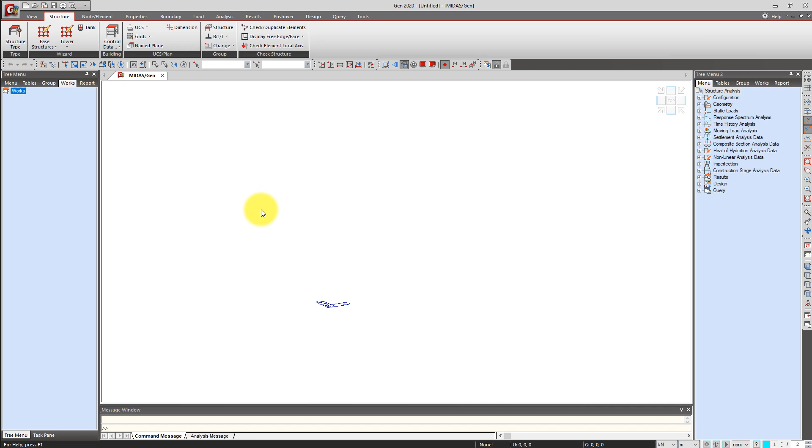The next is you can directly start the modeling from scratch. If you have some frame model, you can directly go to Node/Element, and there is create nodes, the node modeling or element modeling. You can find various types of modeling functions here in Node/Element.

And there's another way you can start. If you go to Structure, here we have a wizard system. Using the wizard you can model typical types of structures very quickly. In Midas we have this tower wizard, with tower leg, body and arm. Today we are going to use the tower leg and body functions to model our transmission tower.

I will start with the tower leg first. When you open tower leg, you can see this kind of dialog box. Here in the tower leg, we have 4 different tower legs. You can change the length of your width, the number of panels, and the select type, front and plane. I will use the default select type for the front and plane.

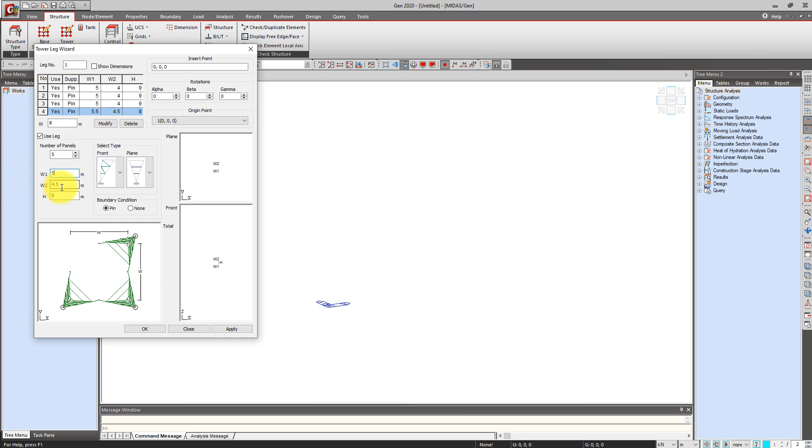When you change your dimension, you can click modify, then you can change the size of the first leg. I will also apply the same input data for the other legs. Using these 4 different dimensions, you can modify your tower leg size by yourself. As you see here in the figures, it will directly be affected when you modify your dimension.

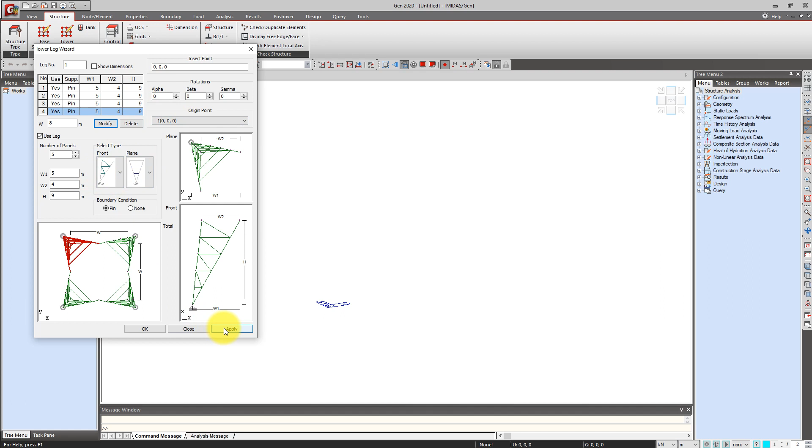After you finish inputting the size, the select type and other options, you can click apply to import your tower leg wizard into your model. As you see here, our tower leg has been imported in our model view. After you check the tower leg is successfully imported, you can now close your dialog.

Now we are going to generate our tower body. In tower body, you can also modify your size; we have W1 and W2. I will input 8 meters and then 3 meters. Here you can add the components for the tower body, the type horizontal and vertical. For vertical you can change the row of redundants. I will input 2 rows of redundants, and change the type to this type. You can use different types of redundants.

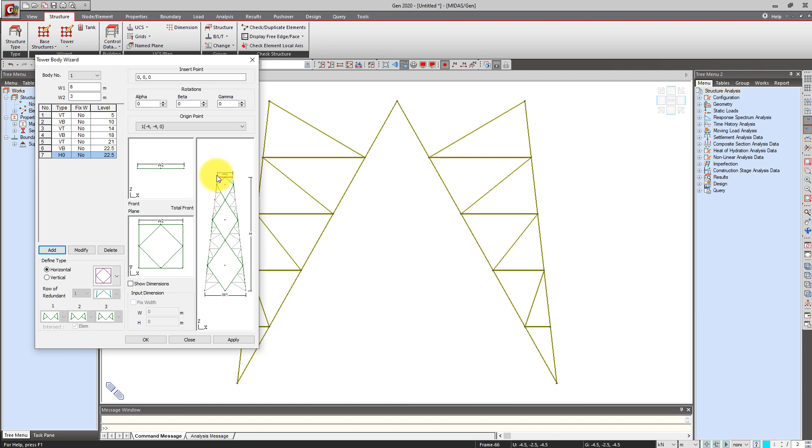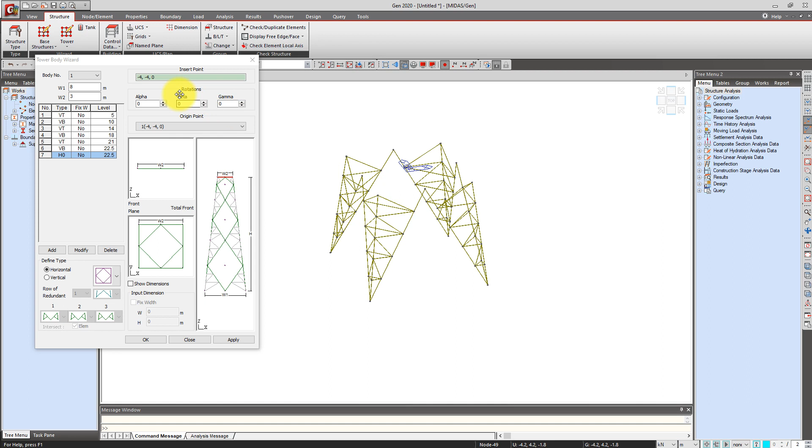So now you can insert this body into your model. If you see here, the origin point is visible. You can detect your insert point when you click your mouse button, and now it will detect -4, -4, 0. Now click on apply.

So you can check your model, your tower body has been successfully inserted in your model, and now we can close. As you see here, we first generated our first leg, and then we added this tower body.

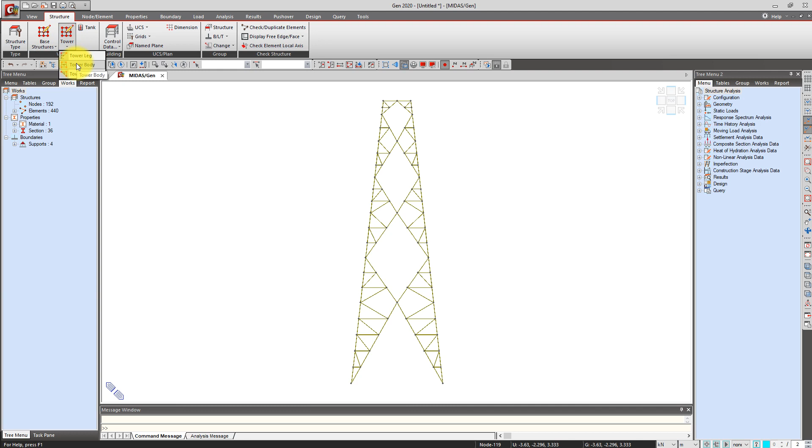Next, we will add another body type. So you can go to tower, and then tower body again, to add another tower body. Now we will add W1 as 3 meters, W2 as 1.5 meters.

Using this tower body or tower leg wizard, you can quickly add your modules and generate this tower modeling very quickly using the wizard option. We will use the same shapes type for the second body, with height 2 meters.

Click on add, and then another shape, the same one, with height 2 meters. Click on add, and then a different type of shape, 2 meters. Click on add. I will also change the shapes, 2 meters again, click on add, and also one more. I will click on add.

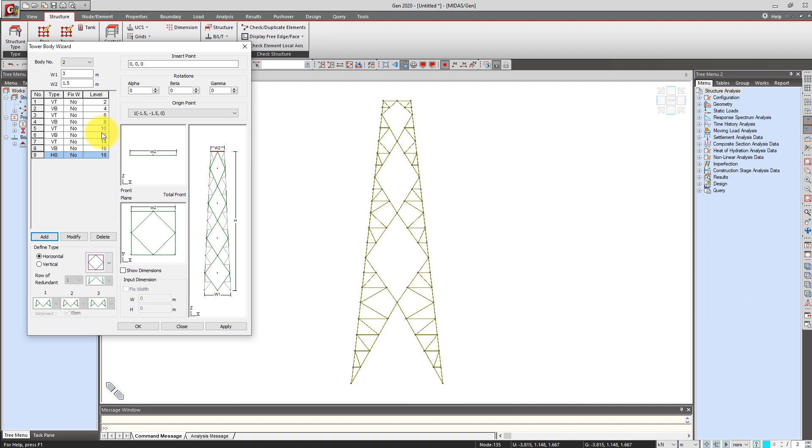Finally, in the top position, we will also use the horizontal type here, and click on add. So now we have this 16 meter level of the second body.

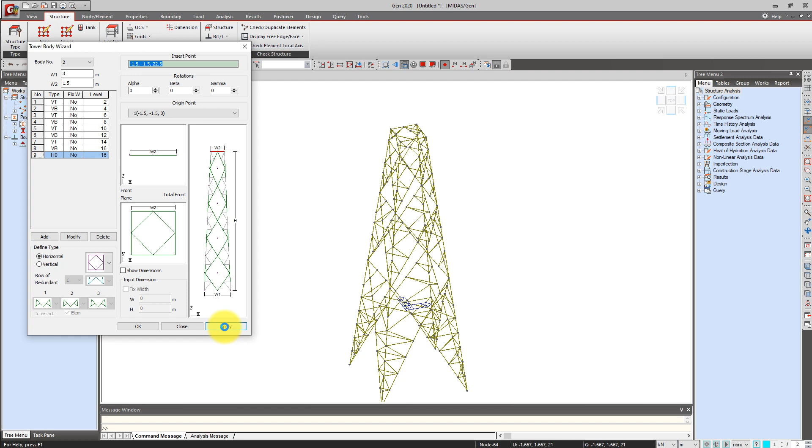In the model, you can click insert point, detect the point here, and then click the apply button. Now you can check your tower model body has been successfully inserted.

After you finish, and check if your model is okay, we can close the wizard. Now we have this type of telecommunication tower, steel tower.

Here in Midas, the third module is tower arm. Tower arm is used mainly for transmission towers. You can use your arm body, and then left arm or right arm.

You can change your number of panels, or change the front type direction and diagonal directions, so you can change your types. The plan type, you can also change this type.

Using tower arm, we can also easily model this kind of tower arm for the transmission tower. For our example, we will not use this tower arm wizard; we will just use the leg and body options.

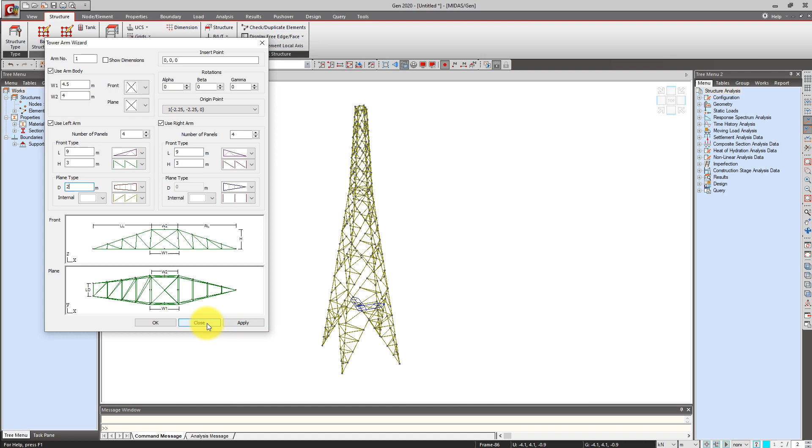After we finish our modeling, we will apply the properties and the loadings, and then we will see the analysis and design result of this steel tower.

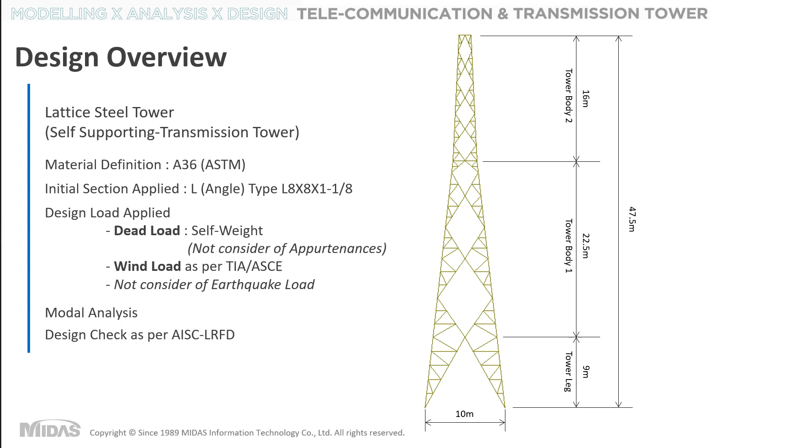In Midas, we have several section data in our library. Using different countries' database of steel sections, you can also use the American standard for the steel data.

You can import those sections in CAD format, and the software will automatically calculate your section property. Then this section data you can import into the model view.

In the software Midas, you can see the actual section shapes in the model view, and you can check the orientation of this member, as well as see the sections in the structure itself.

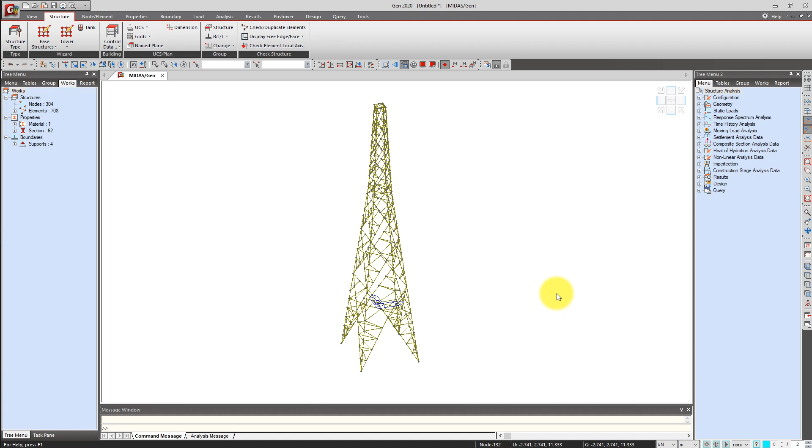So let's apply the material and section data. Go back to the model, here in the properties.

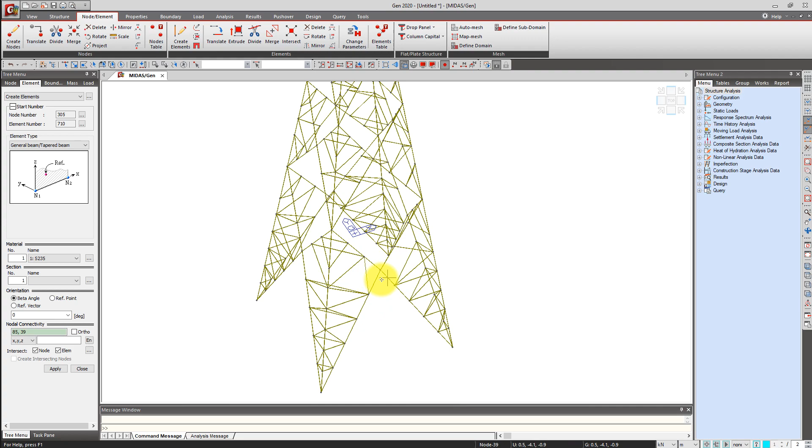Before we insert property, actually in this model we used the wizard options, but if you want to add other members, you can just use this create element button, and then click 2 point to generate other member type. So not only using the wizard, you can also modify very easily using other create elements, translate, extrude, or other element generation options.

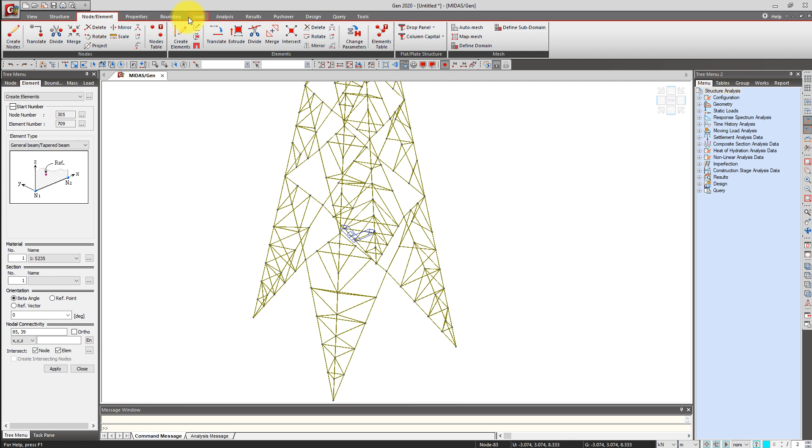Go back to the property. We will add material property first. In the works tree, as you see here, the steel material has already been defined by the software. Since we used our tower wizard, the program applied the default material and then section data from our library.

So you can go to this property here in the works tree, and then we will change into American Standard A36 material. When you select the database here in the material, the program will show you the steel material data in this dialog, so modulus of elasticity, Poisson's ratio, and other material properties you can see here. So we will use American Standard.

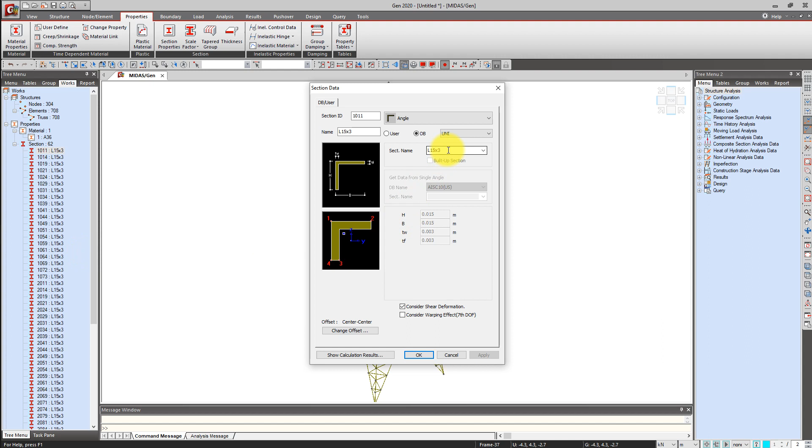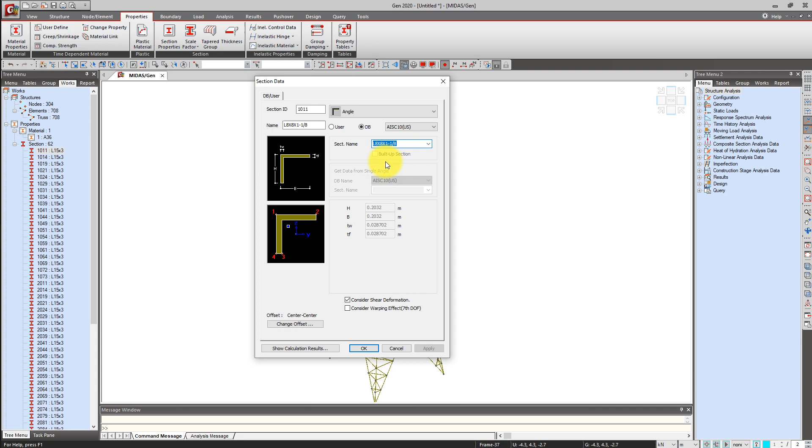And then also the section properties. As you can see, this program already uses the default one. These code settings, you can also change your preference code settings for the material or section data. Now we will change the section data to American Standard. We will use the first section for this one, so we can use these sections.

Now I want to change other sections. As you see here, the main post, redundant, and bracings - those elements are already defined with default sections. Now I want to change them with the same section property as this one. So how can we modify quickly? We can also change similarly using drag and drop. I can double click this, and then drag and drop onto your model, and it will change to the same section data.

But now I want to change all these different sections. So how can we change them? You can go to these sections, mouse right button click, and then go to tables. Here you can see the section data of your model. This section is database and user section, so we can change to the second tab.

And this is our table of the sections. You can directly change here in the tables, but we will use the Excel format import. So here is the Excel. You can copy with Control C from our software data, and then go to Excel and paste your data.

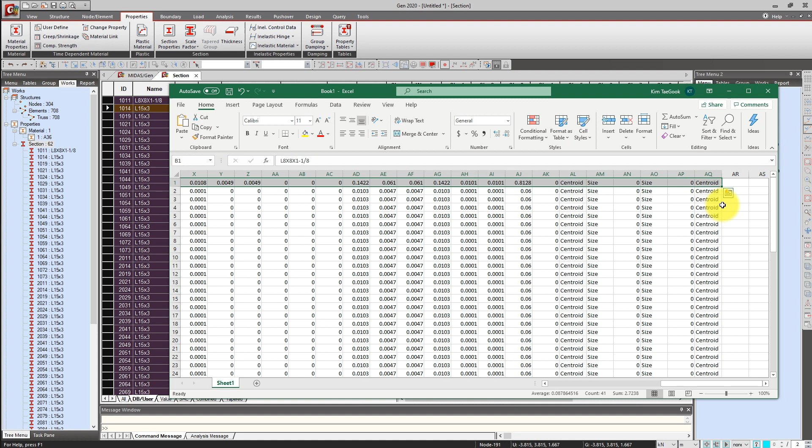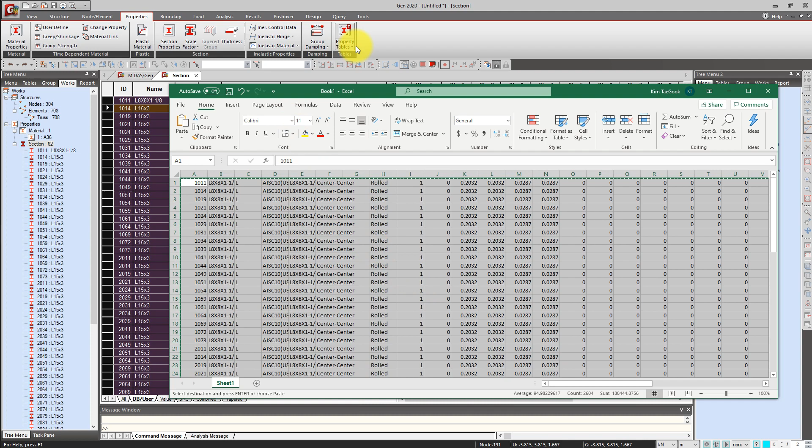So here I want to use all the same sections. Go down, and then we can select all these same tables, and then Control D. We can use this to change all these same sections. Now I can just select all my data, then Control C, and here Control V. So you don't need to modify one by one by clicking - if you use Excel, you can directly copy the data from the software, modify it in Excel, and then paste it to your model.

So the software is compatible with Excel data. You can directly change all the information using the Excel format.

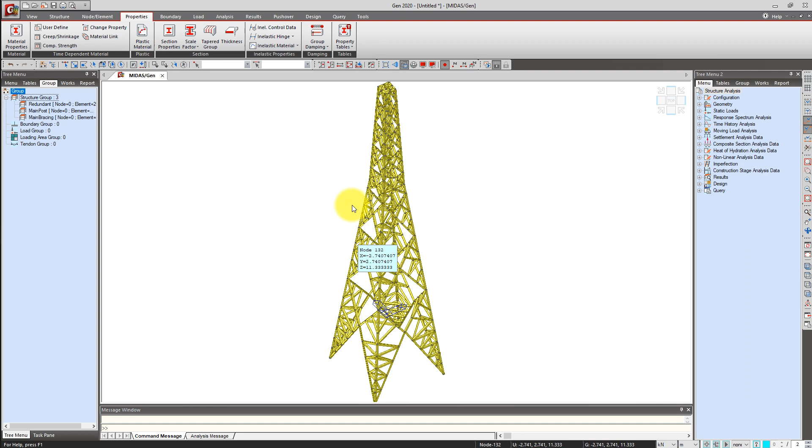So now we've changed the section data, and if you want to change your sections by different groups, you can go to group here. Since we used the tower wizard, the program already makes groups for different parts - redundant, main post, and main bracing. Using this grouping option, you can directly change the section shapes for different types of members. It has already defined 3 different groups.

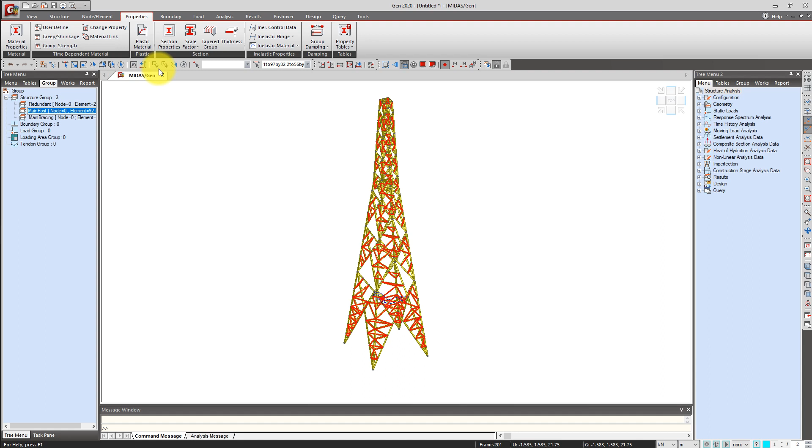I will use the wireframe mode to see a more clear view of the model.

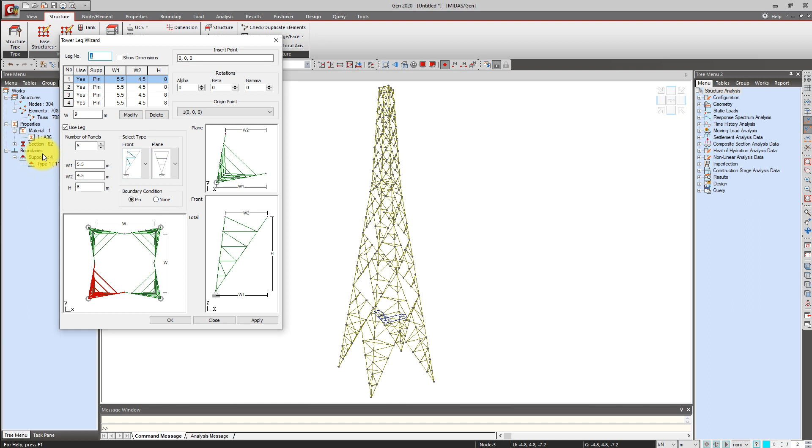After that, we will use the boundary support. You can select the boundary condition here. As you see, we already defined the boundary since we used the wizard. In the tower wizard, there is the boundary condition control, so you can choose pin or none. The default option is pin, so the program already defined the boundary condition. If you want to manually define your boundary condition, you can go to boundary, and then in define supports, we can apply the fixed or pin condition using these options.

After properties and then boundaries, now we will apply the loadings. I will go back to the presentation.

This webinar will focus more on the American code for steel tower design. As you know, in the American standard, we can use AISC code for steel design. But for steel towers, most engineers use the TIA standard, TIA-222 standard. So most of my content today follows the TIA standard, along with AISC and ASCE standards.

In the load combination written in the TIA, for symbols and notations, in the steel tower we can consider dead load, dead load of the structure and appurtenances excluding guy assemblies, dead load of guy assemblies, earthquake load, temperature loading, and wind load. Today we will not consider earthquake for the steel tower, so we will use dead load and wind load.

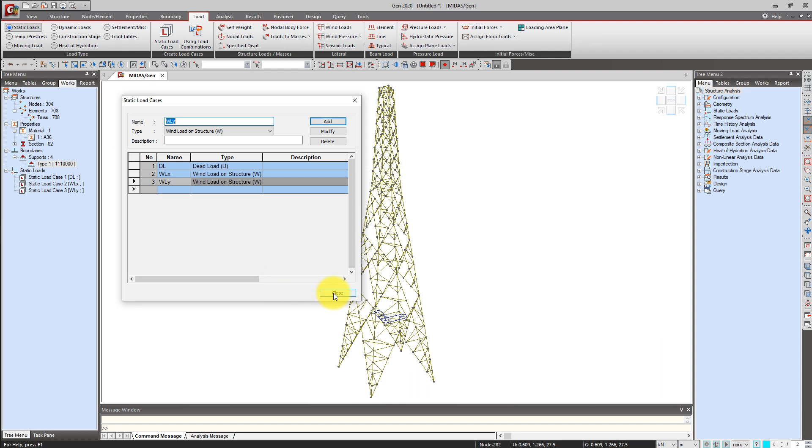We can click close, and the load combination function is under the result tab in load combination. Here in the steel design second tab, you can auto-generate your load combination as per AISC code. Right now we don't have any load case loading for dead load and wind load, but if you use auto generate, the program generates the load combination as per AISC code.

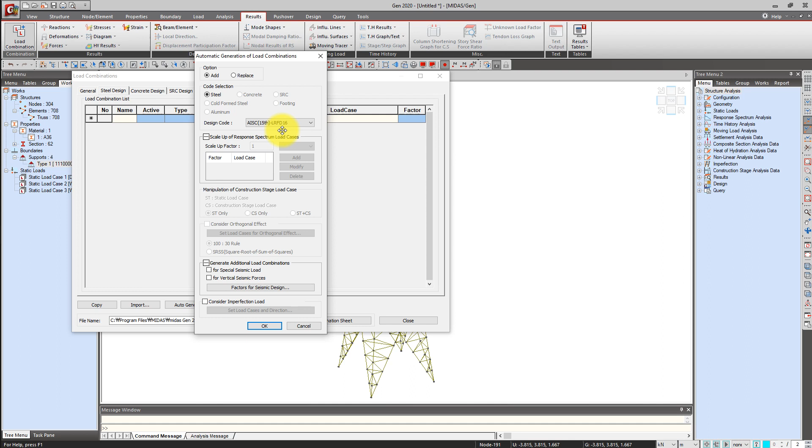You can also directly generate your load case using this spreadsheet form. You can change the name, active status, and type. If we look at the code, we can use 1.2 dead load and 1.6 wind load, and also 0.9 and 1.6. You can directly change these values in the table format, 1.2 and 1.6.

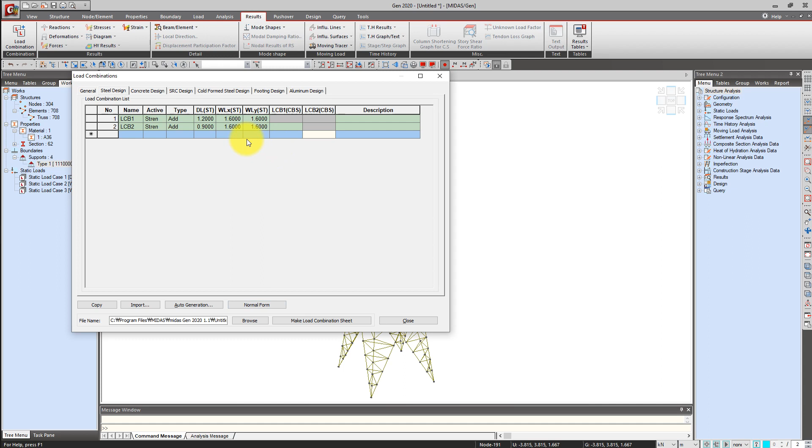Similarly, using these tables, if you have Excel data for an existing load combination in your computer, you can directly copy your Excel data into this spreadsheet form in load combination. That's also available in the software.

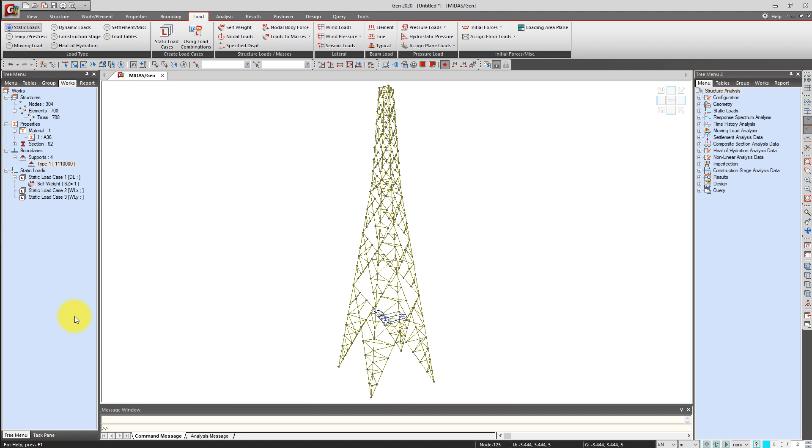Now we will apply the self-weight dead load. Here in the load tab, we already defined the load cases. Now we go to self-weight and choose the dead load group, load case, and insert -1 in the Z direction, which means the vertical, negative vertical direction toward the ground. Then click add.

In this way, you can apply the self-weight into your model. Next is wind load. Here in Midas, we have auto generation functions for wind load. First we will apply the story data for this structure, so go to control data and then story. Here you can use auto generate story data, and the program will detect the Z level for the node position. Click OK.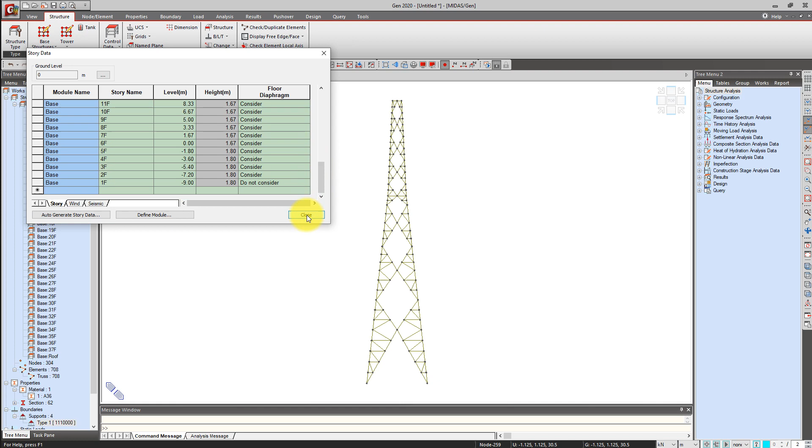Then we can go to load tab and then wind load. These wind loads are the automatic generation functions for wind load as per the code. We click add, and here you can select the code. We can use ASCE7-10 or ASCE7-98, and also other countries' codes. For this one, we will use ASCE7-05, which is the similar code for the TIA standard. I will save this model.

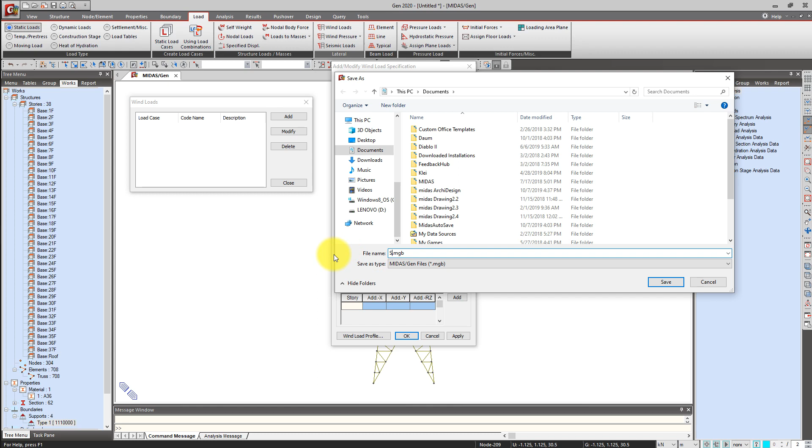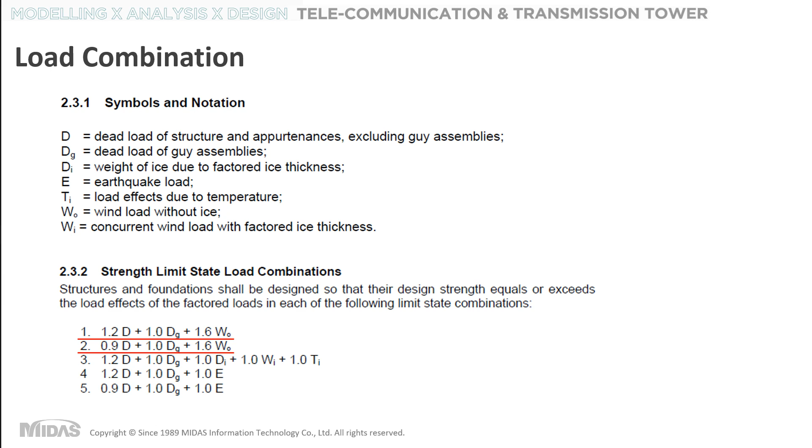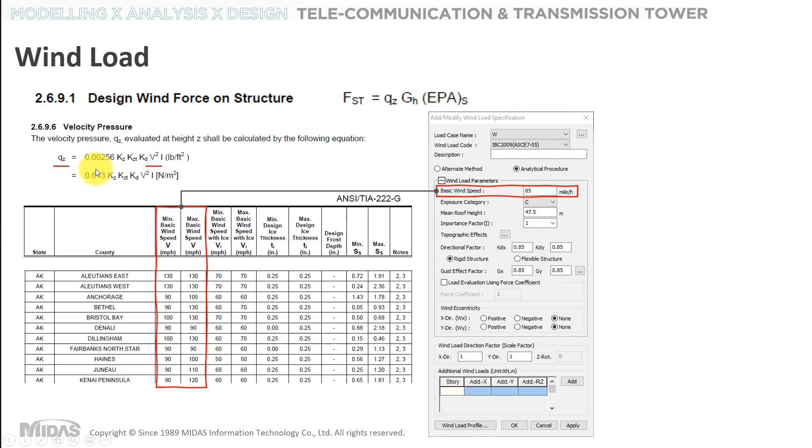So using this option box, you can define your K_z, K_zt, K_d, basic wind speed V, and then importance factor I. So based on all these factors, the program will calculate the velocity pressure q_z.

And gust effect factor. So the program uses this default one, 0.85. But if you want to consider this gust effect as well, then you can go to this option box, and the program will show you the gust effect factor for rigid structures. Here you can also choose the exposure category, and then based on your structure height and breadth, the program can calculate the gust effect factor automatically. So based on your structural height, the gust effect factor is between 0.85 and 1. So you can just click calculate to use the gust effect factor.

And then design wind force on structure. So it's based on the effective projected area of lattice structures. This one is expressed as EPA. So we can use the load evaluation using force coefficient. So we will use the 3.4 factors based on C_f.

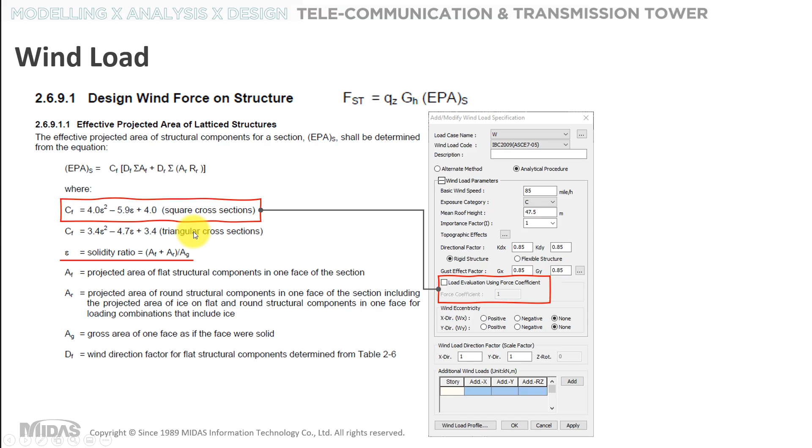So we can now apply the wind load here. So we can use the analytical procedure, and the basic wind speed uses the same thing. We will use exposure category D, and importance factor 1. And then direction factor and topography effects, we will use the default ones. And then the gust effect factor, we will use the program-calculated one. So the program already knows the mean roof height is 47.5 meters. And then we can click calculate, and for the gust effect factor, we can click OK to insert. And for load evaluation, we will use 3.4.

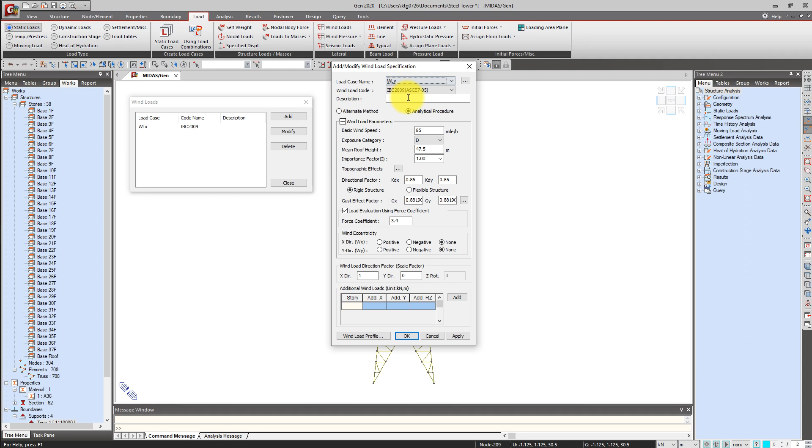And then direction: since we will use the direction for X and Y, we will use this one as 0. As per the code, we can also apply the 45-degree direction for the wind load, but we will not consider that one for today's example. So here we can click on apply, and the X direction wind load has been applied, and then we can change to Y: the direction we change to 0, and then Y is 1.

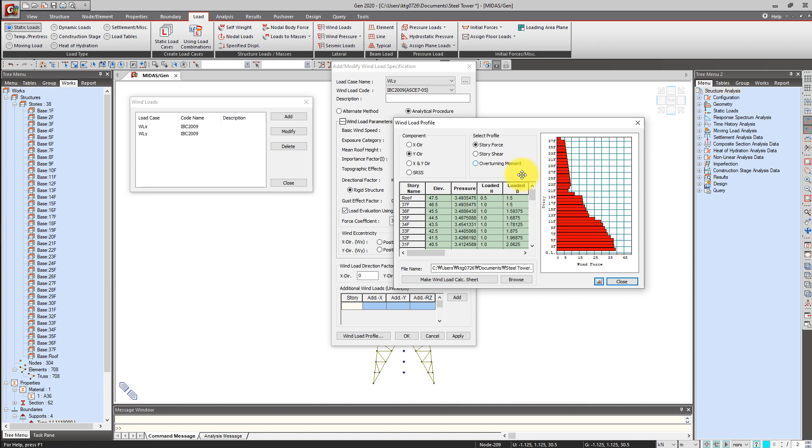Click on apply. So here with the wind load profile button, you can check in the software the story force, story shear, and overturning moment. And then using make wind load calculation sheet, you can also check the calculation process of this wind load. So now we applied wind load for X and Y direction.

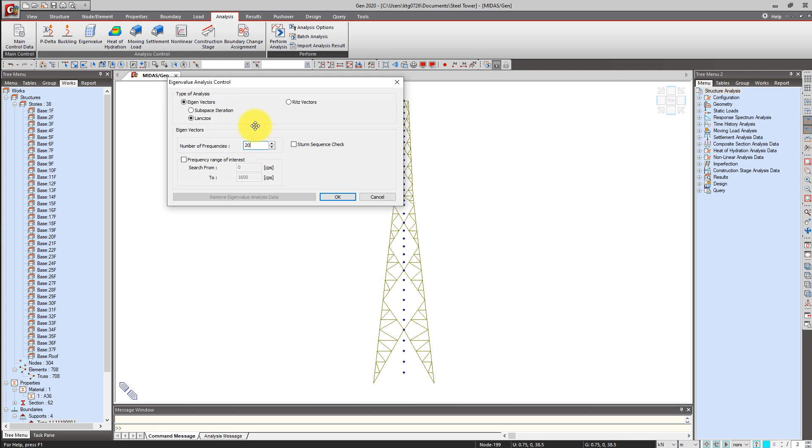And now we will go to analysis. Since we want to consider the mode shapes, I will use 20 different mode shapes for the structure. So here in analysis, and then eigenvalue analysis data, you can apply your modal analysis. Here in the worktree, you can check the analysis control eigenvalue has been applied, and then story, nodes, element, and properties. So you can check your model information here.

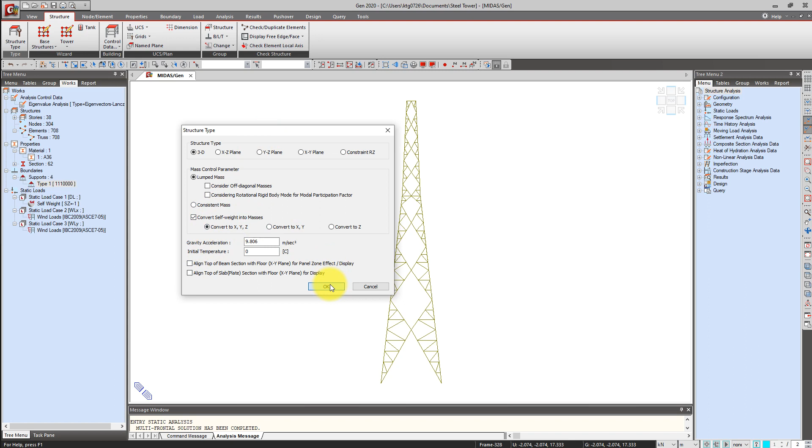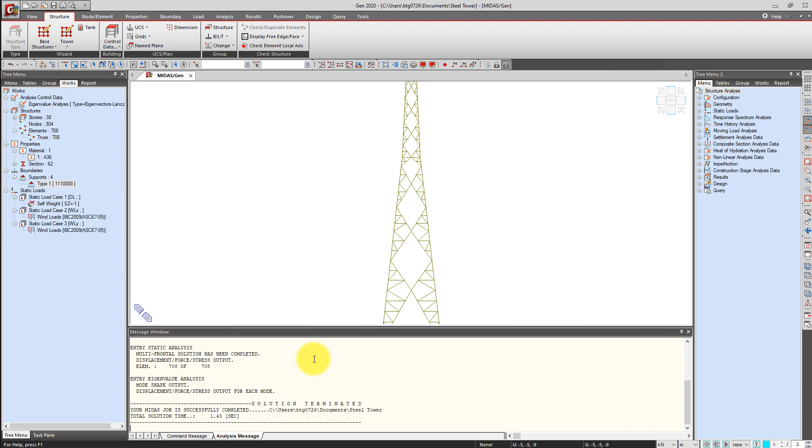So now we will click on the analysis button. Go to structure type. We will consider the self-weight into mass data for the eigenvalue analysis. So now we finish the analysis here. If you go to the message window, you can check your Midas job is successfully completed.

So after you finish your analysis, you can go to analysis results, and here you can go to load combination. As I said, now you can generate your load combination as per the code. So here you can see your load combination will be generated by this standard.

So here in the result tab, you can check reactions or deformation, and then forces, stresses, and other diagrams. We will check reaction forces first. You can select the load cases or load combinations. I want to see the dead load reaction forces first. Vertical direction Fz, and then values together, and legend together. You can select the items you want to see and click on apply. So you can check the reaction forces on your structure, and it will express red color as the maximum reaction forces.

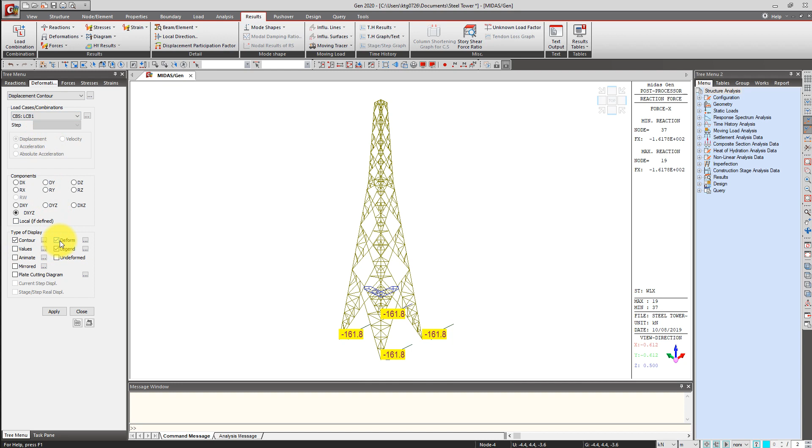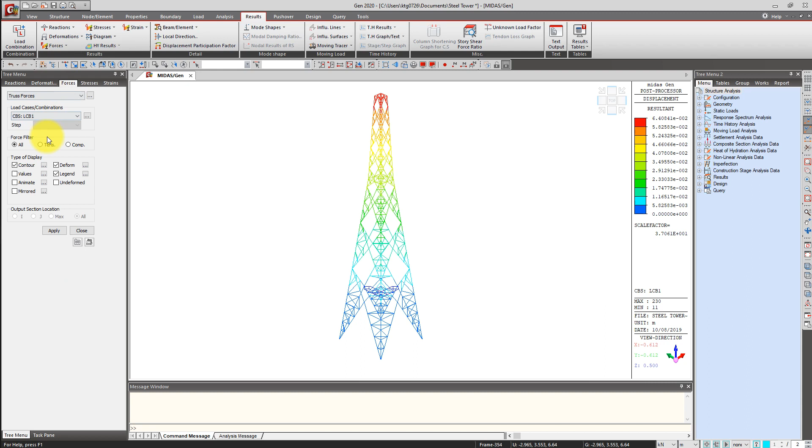And for the wind load, you can also select the wind load for X and Y direction, and then you can check the reaction forces for the lateral direction. And for the displacement contour or deformed shapes, you can also check your deformation and displacement based on load combinations. And then you can check your displacement here in the legend. If you want to see a different unit system, you can also change the units here. And then the forces of your members. So you can also check the forces for your members.

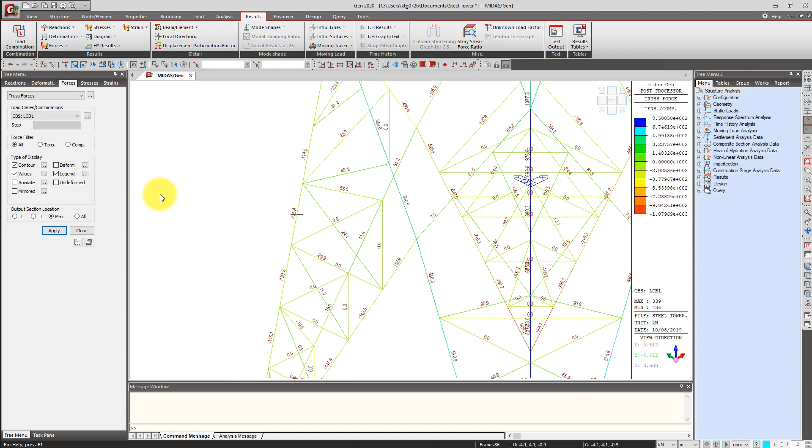And also for the mode shapes, you can go to mode shape here, and then vibration mode shapes. You can check the table data in this small option button or in the result table, and you can go to vibration mode shapes. So in the tables, as you can see here, the modal shapes. The x direction is governed by participation in the first mode, and then third mode and sixth mode, and y direction second, fourth, and then seventh, and z is 8.

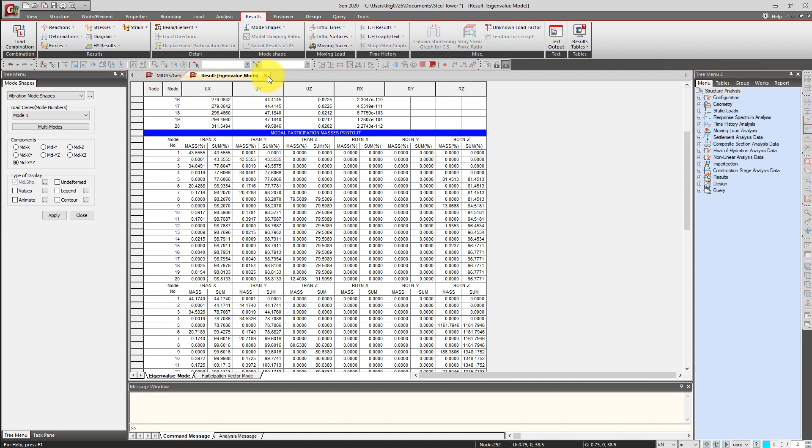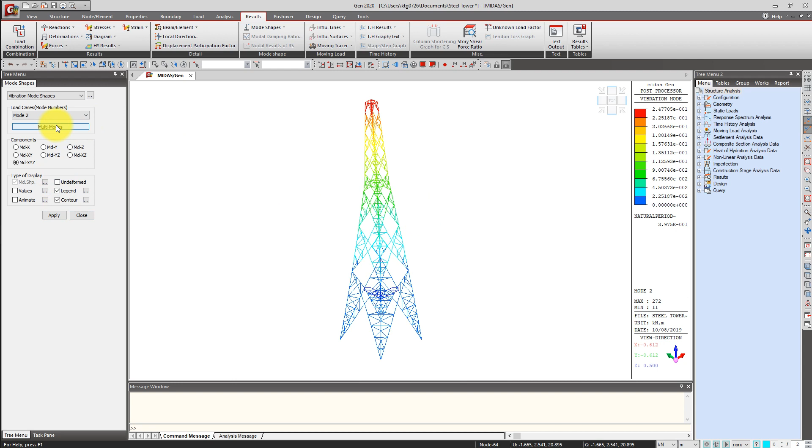So here in the mode shapes, you can see the first mode, and then contour type, legend, click apply, and you can check your mode shapes. And for the y direction the second mode is governing, so you can click apply. Or if you want to see multiple mode shapes, you can go to multi-mode, select the components which you want to see, and click OK. Then the program will generate several different mode shapes in your software. So you can check the different mode shapes.

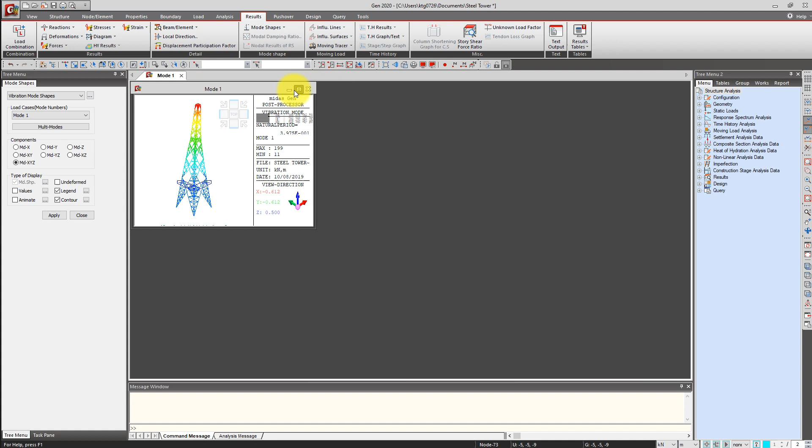So this is how we can check the reactions or displacement and forces, and also the modal shapes of our structure. And now we will move on to the design part.

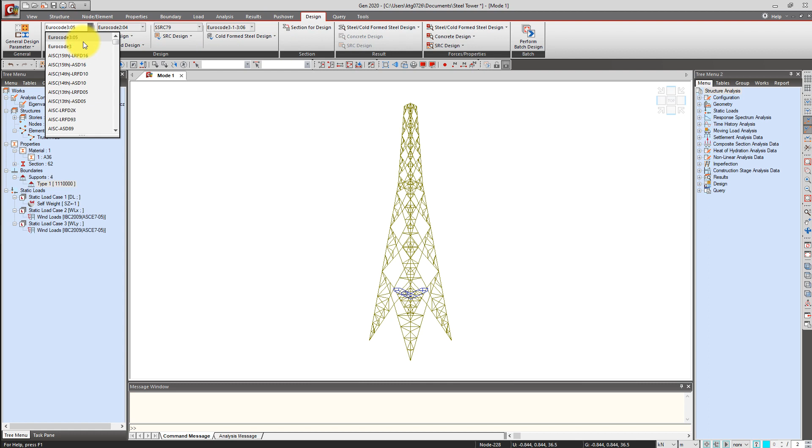So in the design part, you can also change your general design parameter. In the program, we have the function auto calculate effective length factor. And if you want to insert your own effective length factor, you can also go here in the general design parameter, effective length factor k, and then you can insert your own values, or you can select the typical k factor.

And in the steel design, you can also choose the code, AISC code. We will use this code for today. And after that, you can also change the strength reduction factors or modify steel material serviceability parameter. You can change these design options. After that, we can go to steel code check.

So when you do the steel code check, the program will show you the code checking data. So since we use the standard, here you can see in the table format the simple type and then the expanded type. So you can check the member number, combined ratio, or section number, and then the section sizes, the yield strengths, load combinations, and so on. You can check all this information here in the tables.

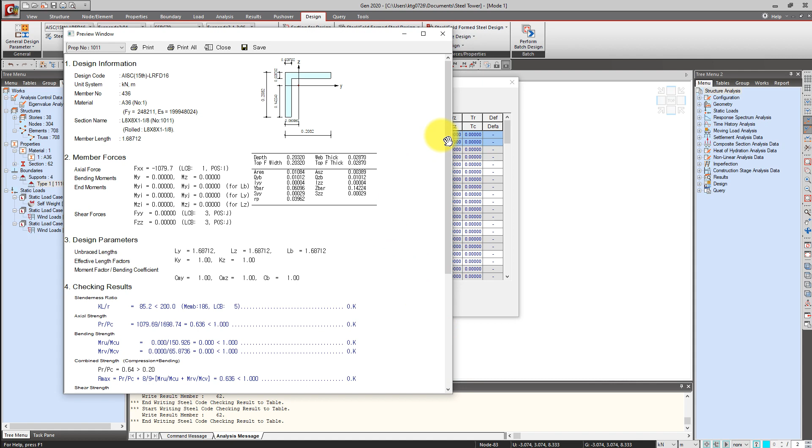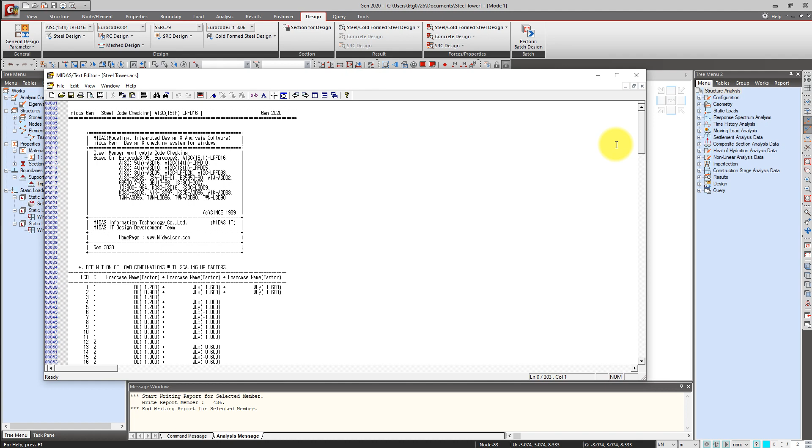And when you want to see the graphic format of this report, you can go to graphic here, and then you can see the summary type of report here. And also, if you want to see the detailed calculation process, you can go to this detail. And the program can generate the detailed calculation process in text format. So you can check all the step-by-step calculation as per the code.

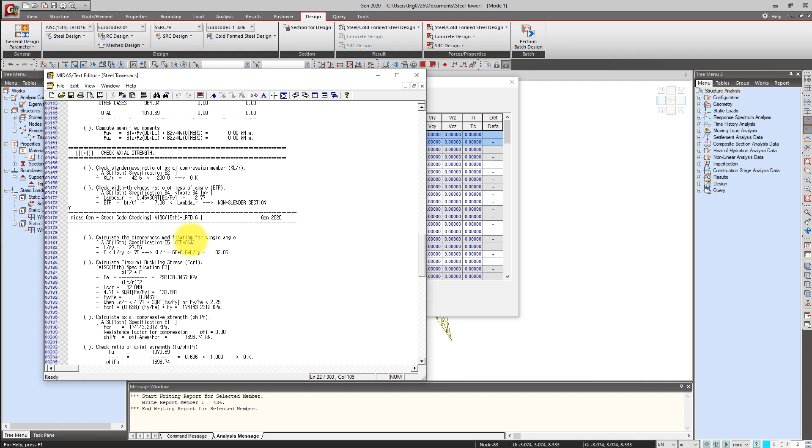So using this detailed report, you can easily find the differences between your hand calculation and the software. So whenever you find an error or a different result, you can directly go to this detail report. And also, if you want to see these change options,

in the change options, you can click the search satisfied section button between the limit combined ratio from 0.8 to 1, which means the program will show you the expected section size based on your structure. Using the search satisfied section, the program will find the suitable section size between the combined ratio of 0.8 to 1. You can also change this combined ratio to another scope.

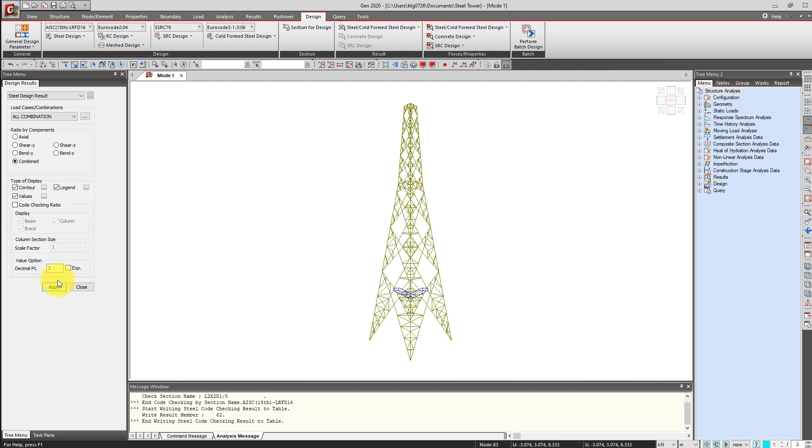So the program will show you the available sections here. So you can select, and then you can also change this member to analyze again. And then, here in the

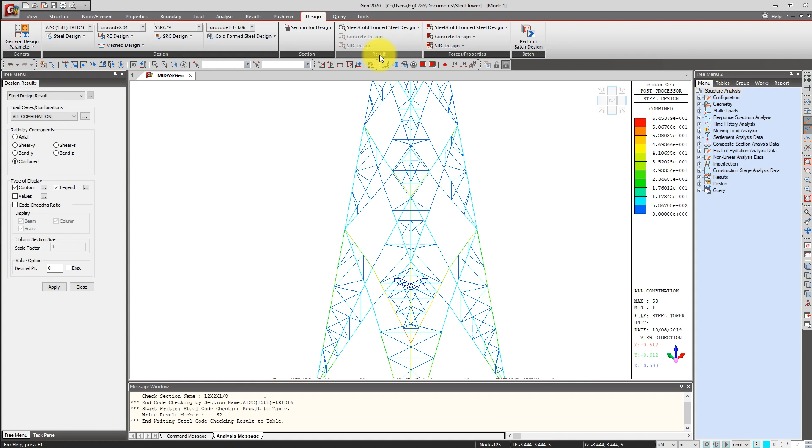so here in the steel cold form design, in the result tab, you can actually see in graphical format your member design result. So it shows the values together, or you can also see in the legend which part of my member failed or passed.

So this is how we can do the steel tower design using Midas. Starting from the modeling, we apply the loading for self-weight and then wind load, and then we can see the design result as per the American standard for the steel members. So now I will show you the Design Plus program briefly, and then we will have the Q&A session.

Okay, so Design Plus you can actually find in the tools, in Design Plus here. So in order to show you the other part, I will use a different model file. So Design Plus is under here in the Tools tab. So in the Tools tab, you can open Design Plus here.

and then steel beam plus column or base plate, and then bolt connection for shear and moment connection, and then crane girder design or purlin girth design, web opening or steel stair design. And for SRC composite, we have composite beam design and composite column design. So this is not 3D software. For example, if I show you the slab module, as you see here, this is the slab module for the design.

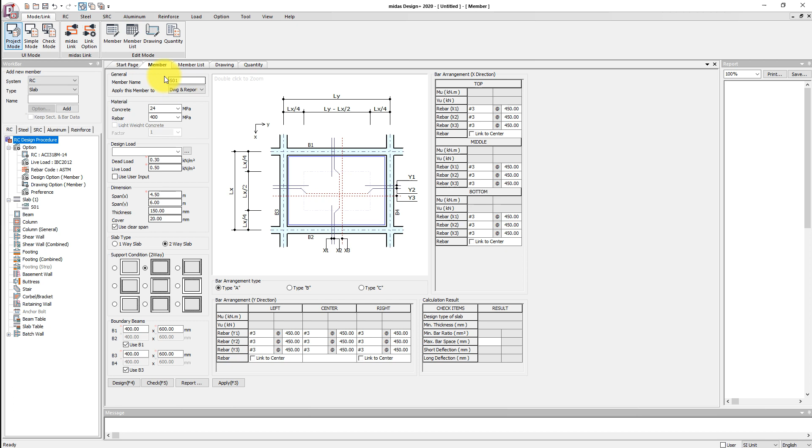You can insert your material data, concrete or steel, rebar, and then design load, you can increase your design load, and then the dimension, you can also change your dimension, span and thickness, cover, and slab type, one-way slab or two-way slab, and you can also change the support condition. So basically in the input options, you can change the parameters in one page for all of this slab design.

So type or rebar size, and then after that you can click on the design or check options. Then the program will design or check your input data here. So in the table format, you can check the design result, whether it's okay or not. And then here in the report, you can see the summary type report and the detail type report.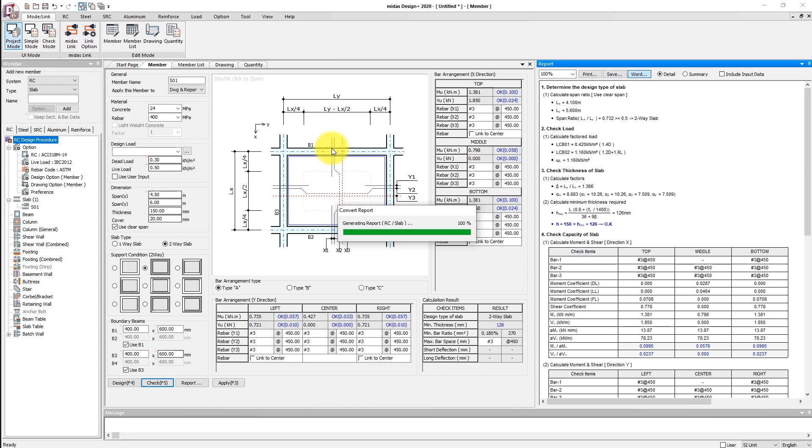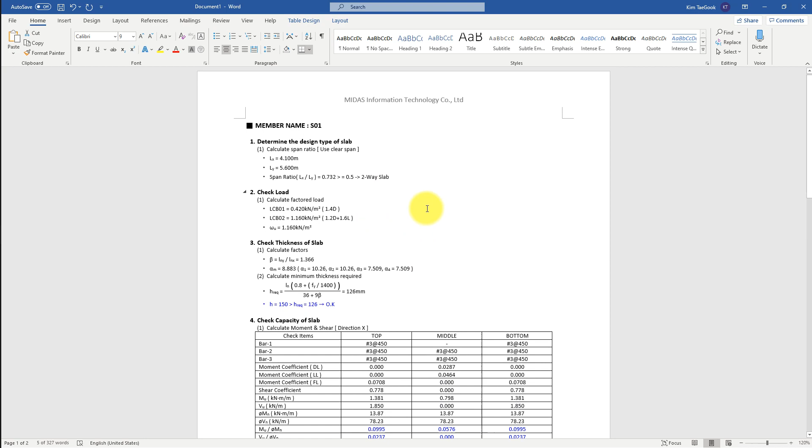So summary type is showing only the design result, and then detail type program will show you the step-by-step calculation process together. And this report format you can save as image file or PDF file, and even Microsoft Word format file. So you can generate the Word format file here.

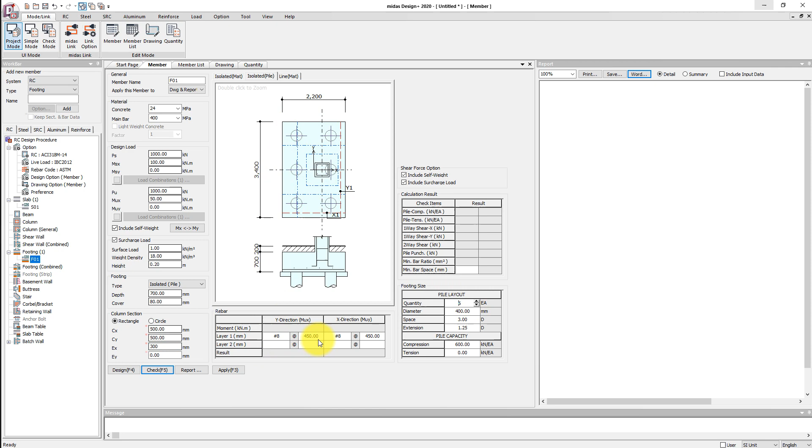And also you can use different modules here as well. For example, for the footings. So for footing design, you can choose similarly concrete material and then rebar material, and then loading, serviceability loading or factored loading. And also you can choose the surcharge load, and then you can change your footing type, mat footing, pile cap footing, and also you can change the eccentricity of your columns, and then you can change number of piles, and the rebar size, spacing, and also you can do the checking.

So it's very quick software. You don't need any learning material or learning curve for this software. Once you use this software, you already know what is the concept of this software and how to use it. And here, as you see, you can see the summary type report or detail report. So in the detail report, you can see the step-by-step calculation, moment capacity or shear, and then two-way shear, punching shear check. So you can see all the calculation process.

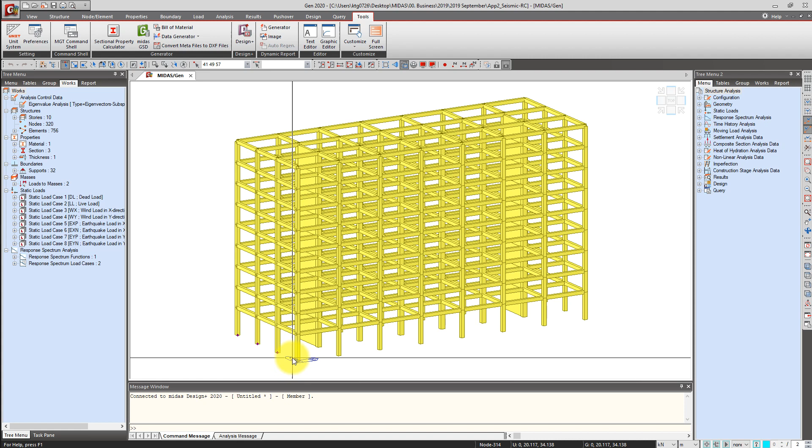And also in this software we have a very good feature, which is the Midas link option. So in Midas Gen software, in the structural part, we have for example a building model, and we can actually link the Midas Gen program together, connect. And now if I go to Gen software, you can select the nodes of the footing positions, and then go back to Design Plus, it will show here as the node positions, and then you can change the option to import your node positions.

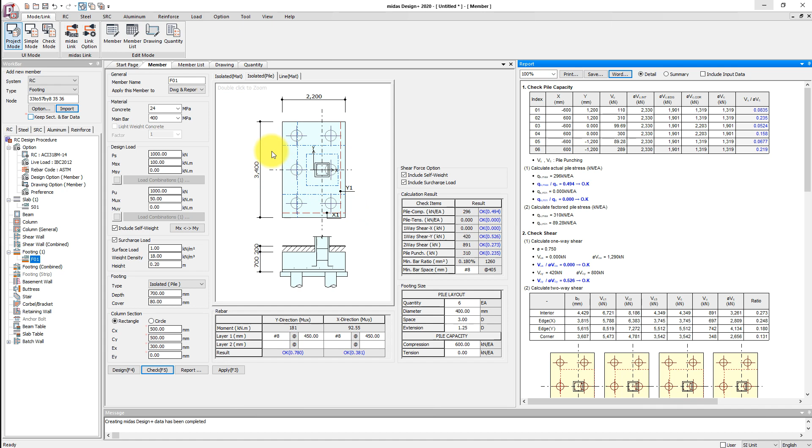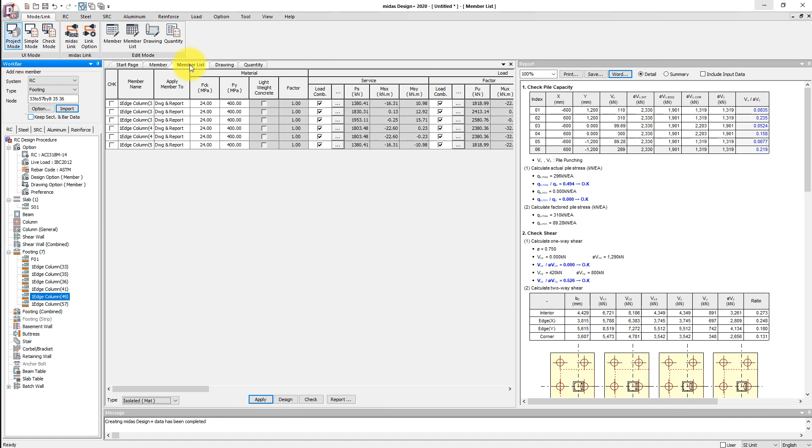Then when you import your nodal positions of your 3D structure, it will directly insert here in the different 6 nodes. So as you see here, the load has been imported together, and the column size has been imported together. So you can check load combinations, or you can check the node size, loading values, and then you can design for these members. Since we have different 6 nodes, we also provide the Excel format. Using this Excel format, you can directly change your input data in the table format.

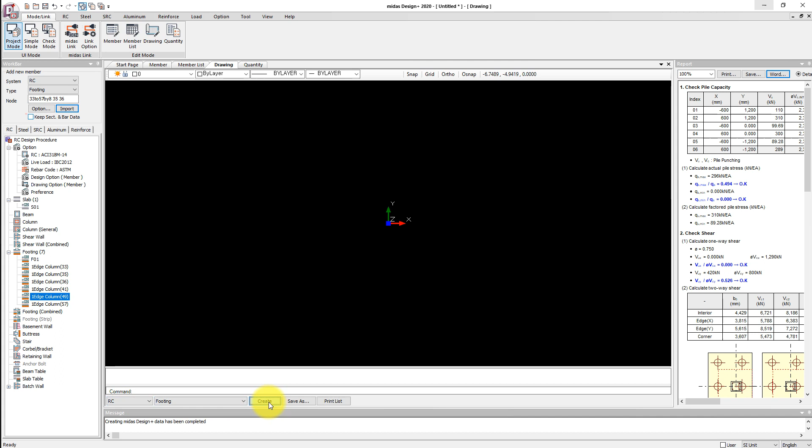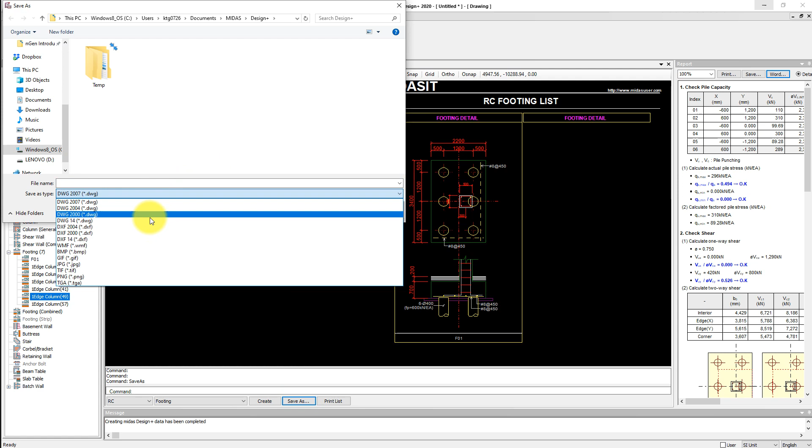And also, if I move to drawings, then you can select just RC footing and then click create button. And then you can generate your drawings. So this drawing is already in DWG file format. So DWG, DXF file format, you can just save as AutoCAD format.

So we have various different types of modules. So retaining wall. You can change the factors, parameters for retaining wall, and then you can do the design for your retaining wall. Or in the steel part, we have base plate or connections, moment connections, or crane girder and so on.

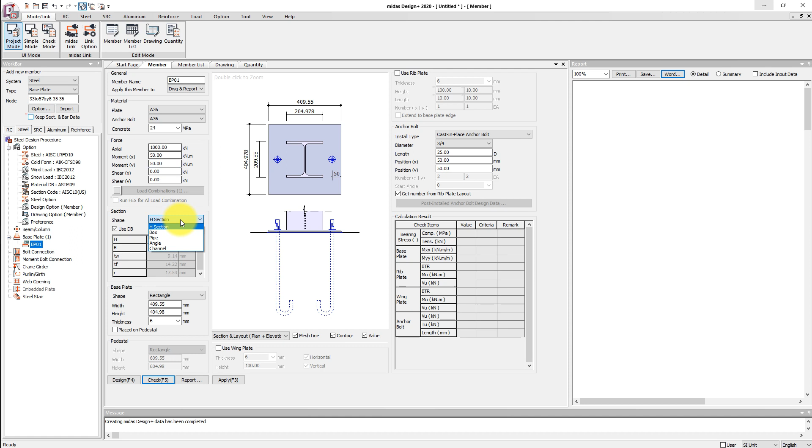So for the base plate, you can also increase the force, the biaxial moment, or you can also change the shapes, H section or box, pipe, angle, channel sections, or you can also use the stiffener for wing plate or rib plate, and then you can do the design for base plate. And also for the drawings, you can just select steel base plate and then create button. You can generate your drawings as per AutoCAD format.

And those who are using composite beam design, we can also use the composite beam design as per American code. So you can select the materials and then slab thickness, or you can use deck plate sections, or deck plate directions, and then the loading, live load and finish load, and then you can increase the loading, and then you can design for composite beam.

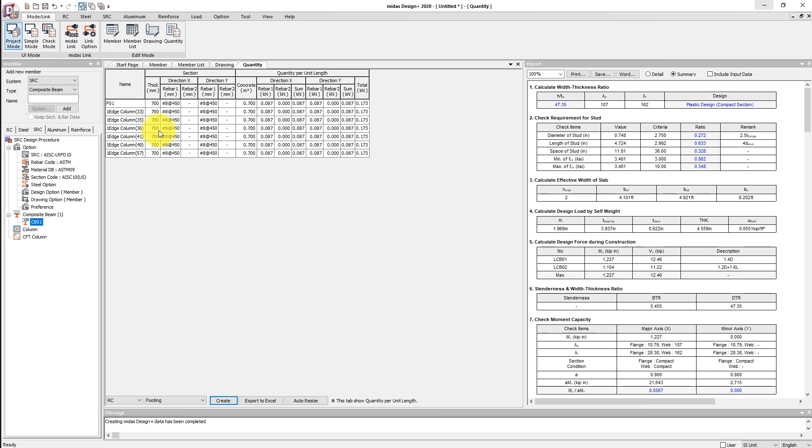And also for the quantity takeoff, you can just use RC, for example, footings, create button. Then you can see the design case by case, the quantity takeoff in this table format.